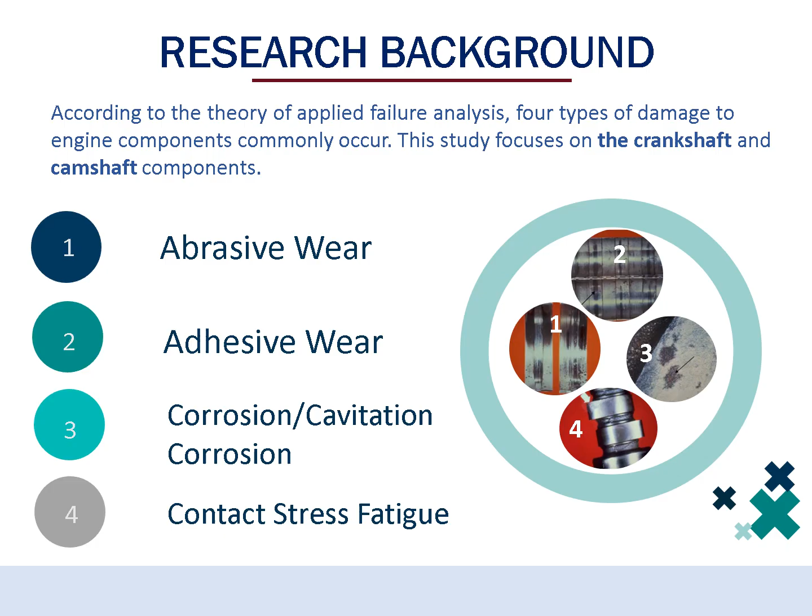Among the common damages on the surface component, there are many types, but this time I will describe four types commonly occurring in surface components. The first is abrasive wear, second is adhesive wear, third is corrosion or cavitation corrosion, and the fourth is contact stress fatigue.

The methods for identifying surface failures in the components by technicians usually uses a manual approach, by visual inspection and damage classification. First, the technician performs visual observation of the damaged component, and then classifies the damage using this method.

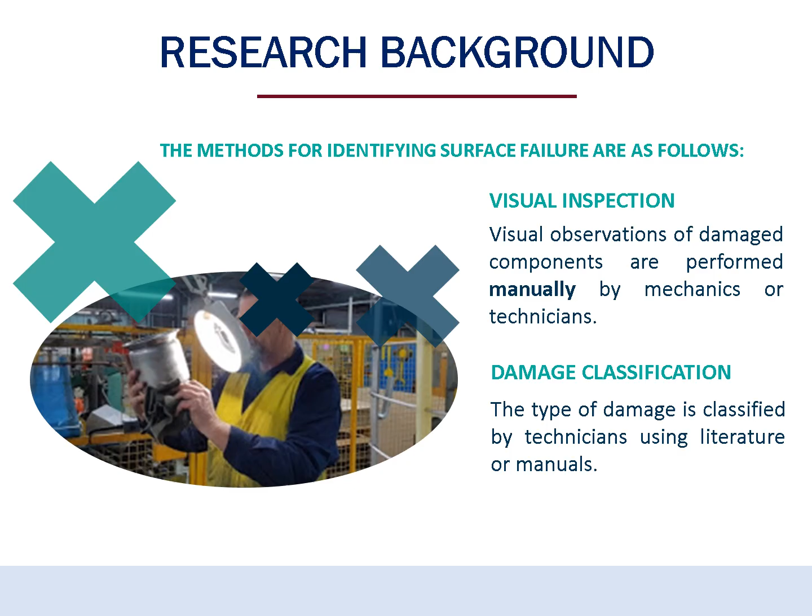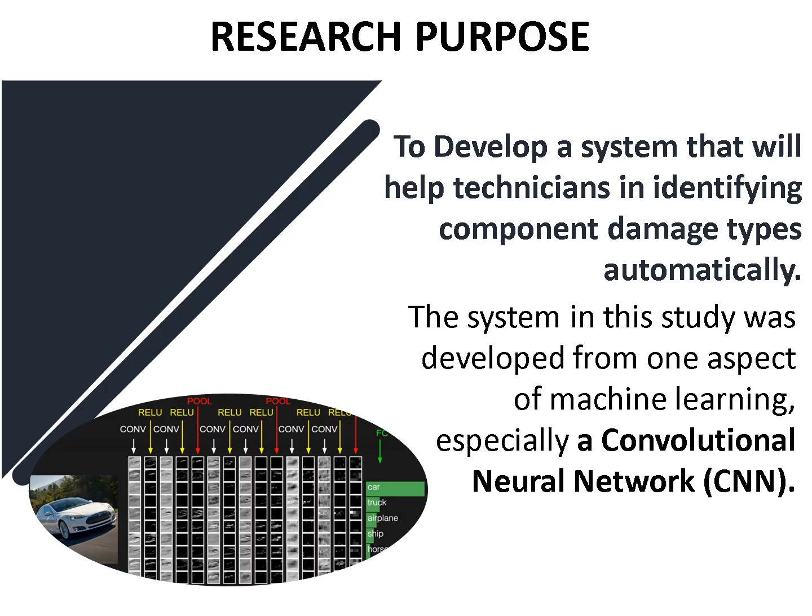Based on the research background, we define the purpose of this research as developing a system that will help technicians or mechanics identify component damage types automatically. This system was developed using an aspect of machine learning, especially the convolutional neural network algorithm. Next is the research methods.

In this study, we obtained the data in the form of images from PT Trakindo Utama. The total data we obtained is about 5,077 data, of which about 5,000 data is components made of iron, and about 3,700 data is images of crankshaft and camshaft components.

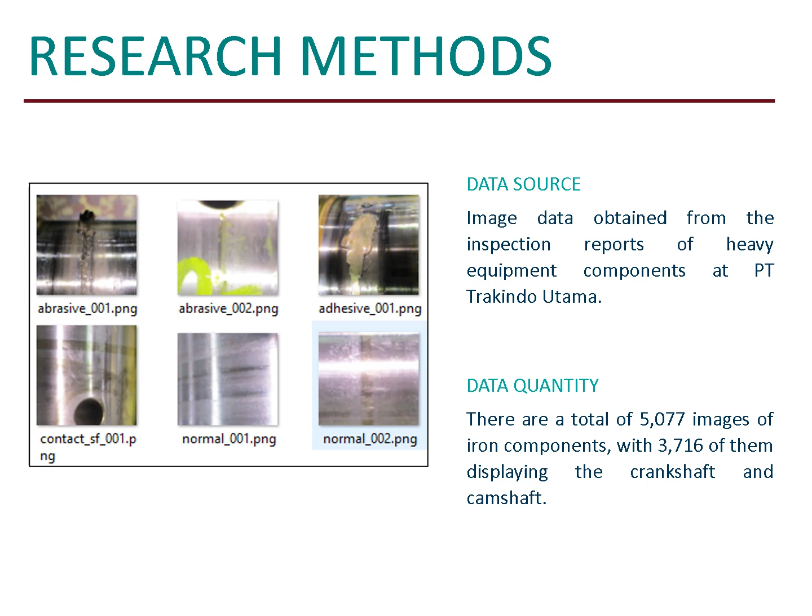Next is the data processing. In this investigation, the object will be recognized in 10 different classifications. We made 10 data classes: abrasive wear, adhesive wear, corrosion, contact stress fatigue, cavitation erosion, fretting corrosion, erosion, brittle fracture, ductile fracture, and oil passage.

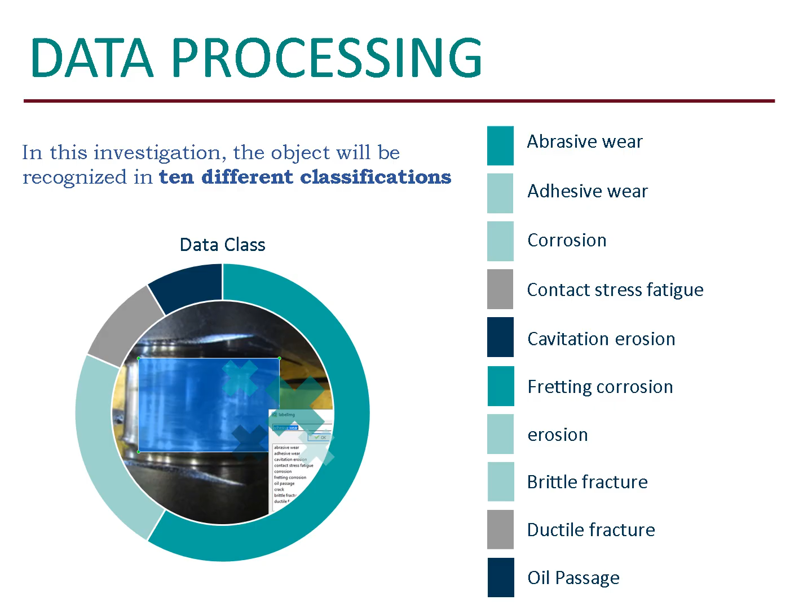Then the dataset of crankshaft and camshaft images used for training, we chose just 951 images. Actually, this time we selected high quality images. The data for camshaft and crankshaft is 951, and the dataset image is manually marked with a bounding box like this.

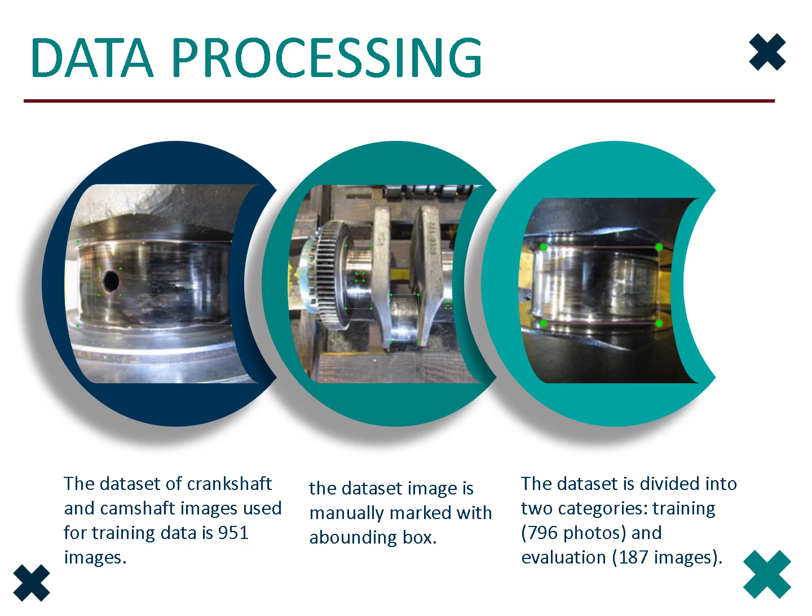The dataset is divided into two categories. First, we trained on about 796 photos, and then we made an evaluation on about 187 images.

To shorten the training time, we use the MobileNet v2 SSD checkpoint file that has been trained on the Open Images v4 dataset. For this dataset, we use 601 classes to classify the data for transfer learning.

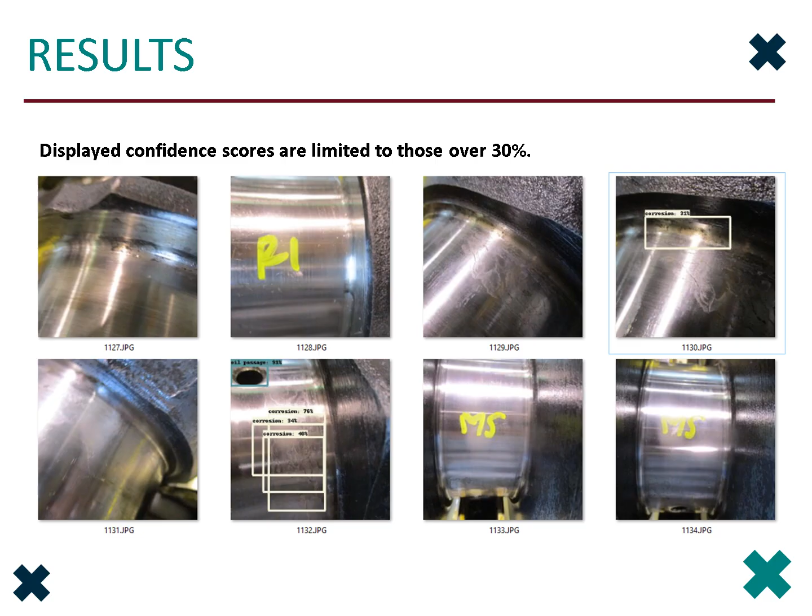Now the next slide is the results. Here we can see some of the data results from the training process using the convolutional neural network algorithm displayed on this slide. The data is restricted to values over the 30% confidence threshold. Some of the generated data contains damage readings that are still undecidable regarding the nature of the damage, so it is necessary to select the data with high quality.

In the next slides, here we can see the system can also detect several different types of damage in a single image. Here we can see the system detect adhesive wear and corrosion, and also in this image adhesive wear and abrasive wear. The third image shows the algorithm can detect ductile fracture and also adhesive wear.